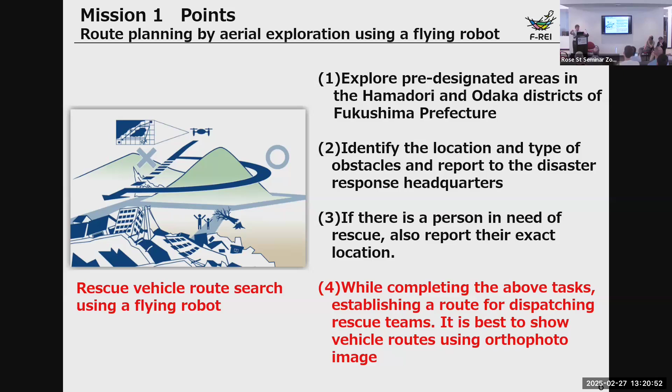Let me explain mission 2 a little more. You can see the 2 persons with a help sign, and you search for letters, English letters like water, medicine, clothes, or food. Then you have to transport such requested supplies. You recognize the letters painted on the ground first, then deliver supplies requested by rescuers by landing or dropping at the designated locations.

Mission 3 is inside a building. The mother drone will carry the kid's drone, a small drone, and then dispatch the small drone to go inside through windows or some door. Windows are normally not so big, below 1 meter wide, so the small drone goes inside and checks on the victims like this. This is mission 3.

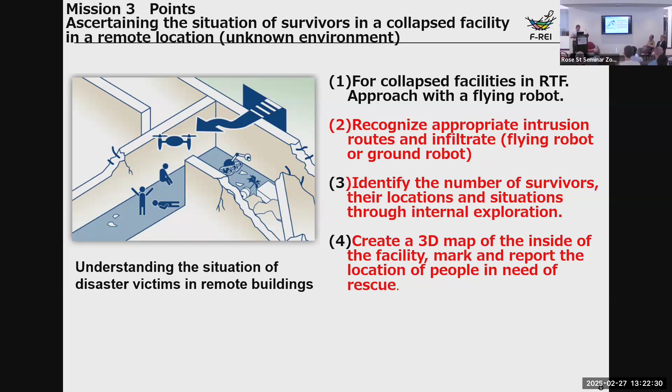This is a harsh environment drone challenge, so a radio wave relay system is needed to realize safe and reliable operation. You can use many drones, that's okay - we don't have a limitation on the number of drones. So many drones is much better than just a few small drones.

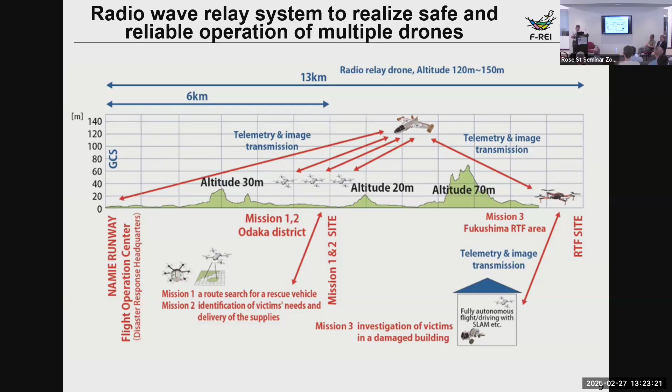You need a radio relay system like this, because we have very small hills, 30 meters high or 70 meters high like this. So this is one difficult mission, one of the difficult missions.

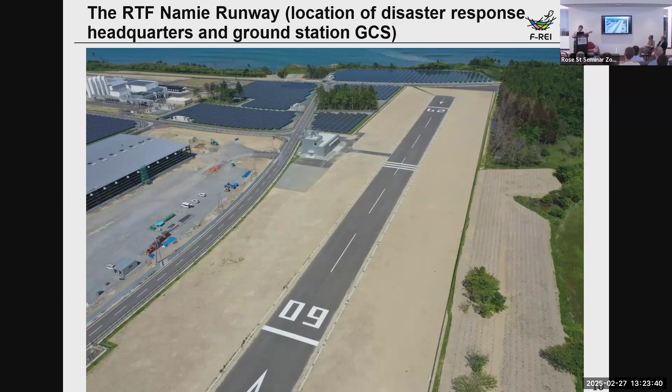This is the takeoff and landing site, like a runway. You can use fixed wing aircraft also, because this is a takeoff site and also landing site. This is a top view - it's almost 100 meters wide and 500 meters long.

For mission 1 and 2, as I already mentioned, one is the rescue vehicle route search. Mission 1 is the left-hand side of this area, and the right-hand side is the mission 2 area. You search the letters on the ground, and then another drone transports supplies requested by victims.

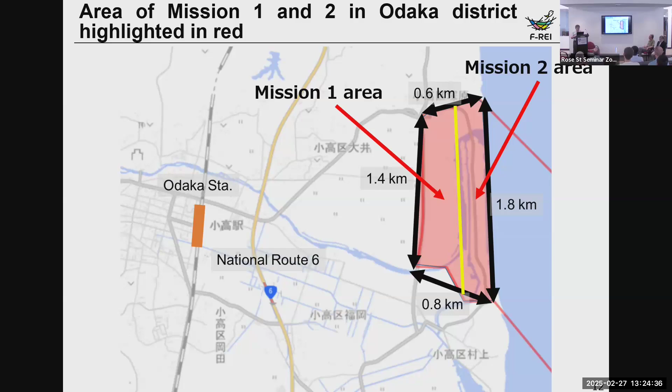Mission 3 is a 3-story building like this, at the robot test field, inside of the robot test field. You can see the small windows, so you go inside through this kind of small window. A very, very high hurdle, I think.

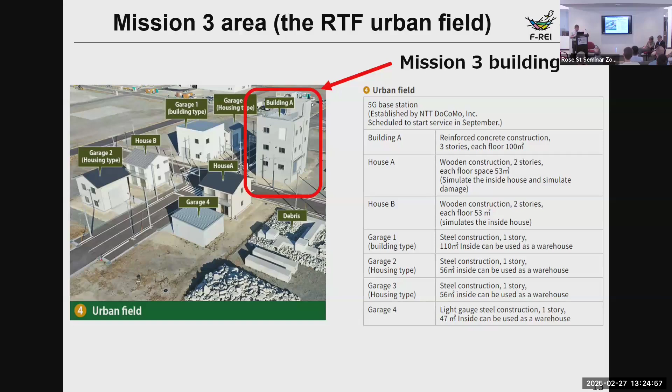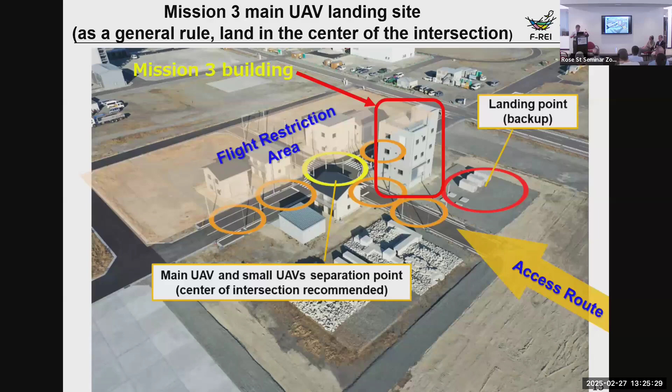So mission 3 is this. This is an overview of the robot test field - 1 kilometer long and 500 meters wide, so a very wide area. You can hover or land in this area, the yellow circle and the red circle and so on. There's an access route here, because we have a high voltage power line, so you can't fly over the power line.

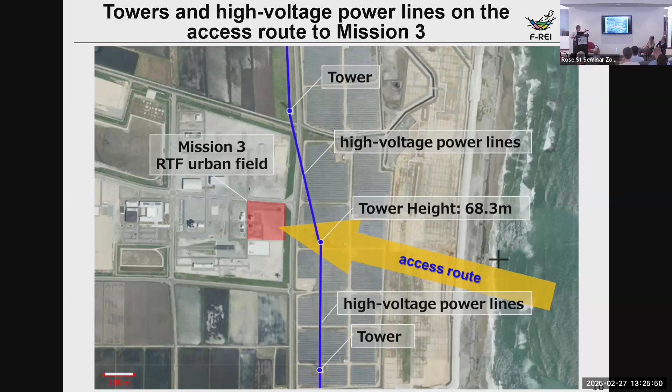So the access route is shown here. On the right-hand side is the Pacific Ocean, so this is the east side, this is the west side.

And after application, we verify all the documents, and we are going to submit them to JCAB, the Japan Civil Aviation Bureau.

So JCAB will check and evaluate all the documents, and then we can get the permission to fly.

This is maybe the same process in Australia. Every country has the same process. You have to submit documents to get permission from each country's civil aviation bureau, so this is the same.

And then October 10 to 12, the 3-day challenge will follow.

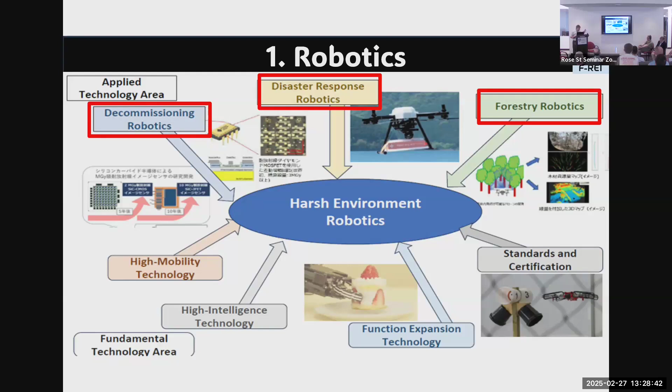So we have very huge, very important 3 missions.

And I already mentioned recruiting researchers. So this is a call for researchers - if you like Japan and Japanese culture, and...

if you'd like to research in Japan with other members, please apply to this recruiting system. We are recruiting researchers at any time.

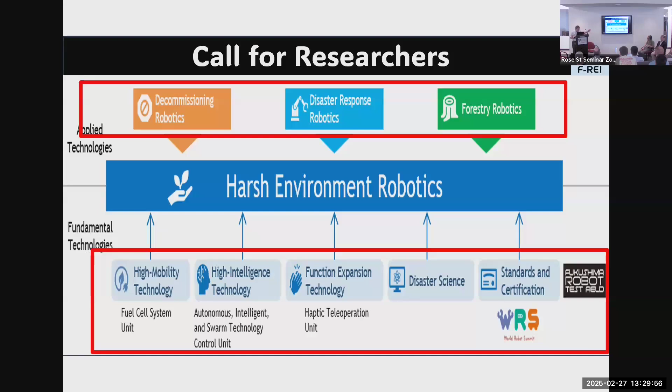The second one is high intelligence technology, like autonomous intelligence and swarm technology. The third one is function expansion technology, like haptic teleoperation - Professor Ohnishi will talk about this.

And for high intelligence technology, Professor Matsuno will present after this, along with disaster science, standards and certification.

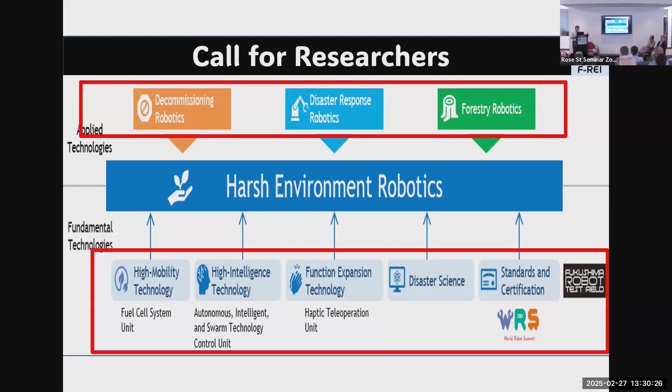Okay, so now we have myself, Professor Matsuno, Professor Ohnishi, and Professor Tomizuka. He is living in the US, at UC Berkeley, a very famous control engineer in the US - he is Japanese, of course.

And the third one, on the right hand side, is the unit leader, Professor Yama. He is leading work on hydrogen-based fuel cells to implement in drones, to increase payload or long distance.

...duration of flying. This is F-REI's robot test field, which joined F-REI this April.

So I'm showing the robot test field. You can use this area if you are an F-REI researcher.

Okay, and the subtopic is UAVs, just briefly. This is the global drone market trend data.

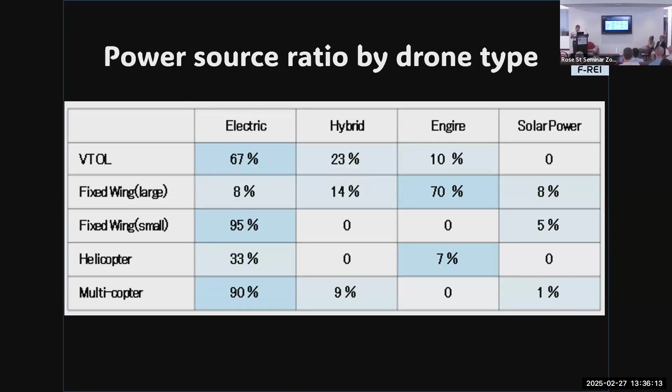So multicopter is almost electric-based drone. On the other hand, small fixed wing is also electric-based, but large fixed wing is based on 70% engine. The helicopter is 33% as well.

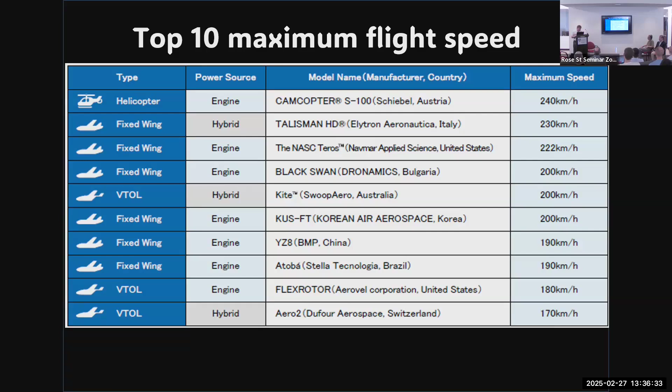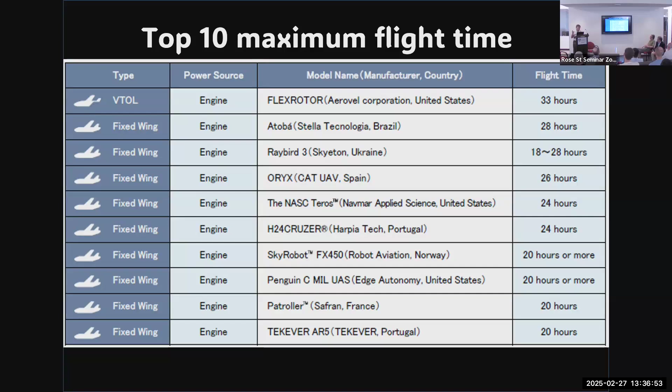This is the top 10 maximum flight speed, a very small number, so I sent it to Professor Manchester. Please distribute to your colleagues after this. This is also flight time, top 10 ranking. I surveyed this myself, not from DII drone industry data. I did it myself, took 2 years to survey. So this is the top 10 maximum flight speed and time.

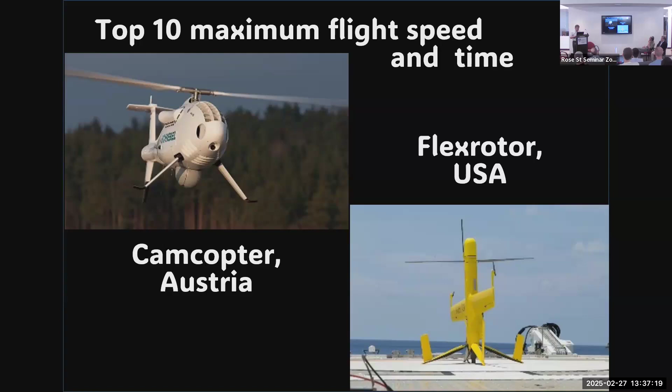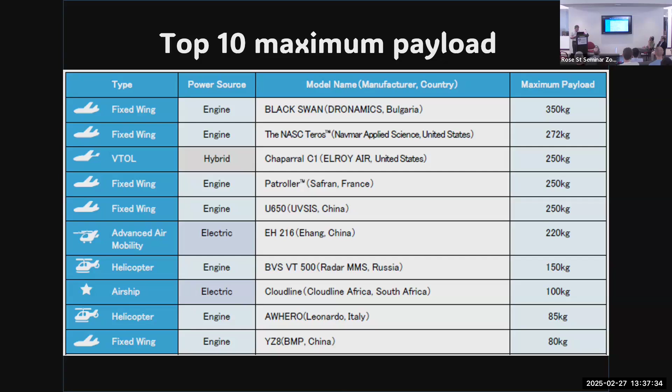Camcopter from Austria, not Australia. Flex rotor from USA. This is a tail sitter aircraft. This is the payload — the big one is 350 kilograms, very big payload, which is Black Swan by Bulgaria, not the USA. This is Black Swan, Bulgaria. It's very big, like a passenger aircraft, very similar to a passenger aircraft, but it's an unmanned system, no pilots. This is the maximum flight speed with electric only.

So this is the very famous Wingcopter in Germany.

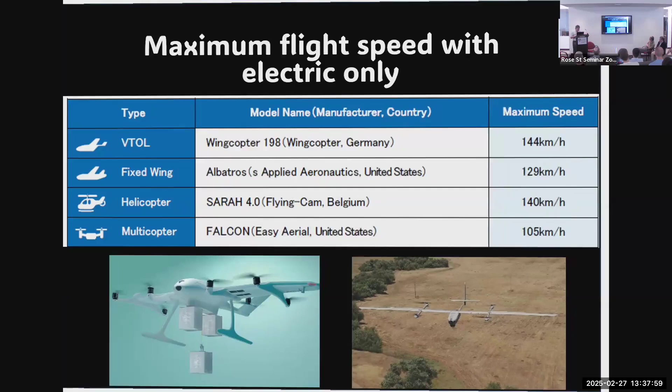After this, I will show you three final movies. These are our companies — I started two venture companies. One is already IPO, the other is still ongoing. My second venture company is in that field. I don't have much time, so I'll pick.

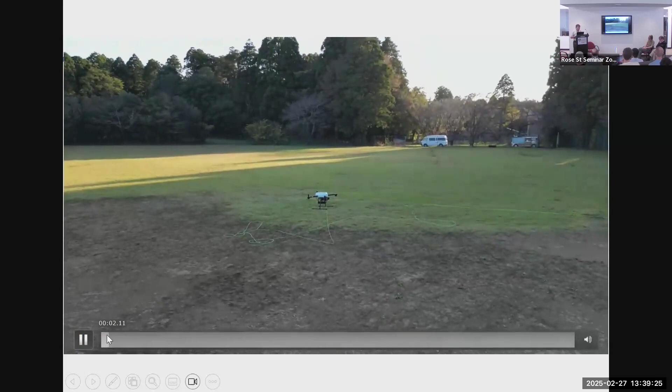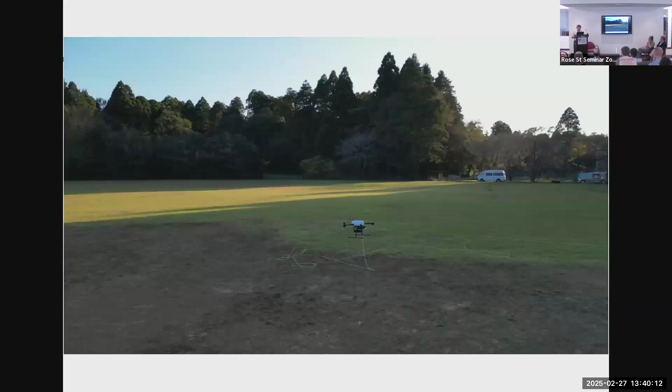The next one is this wire drone. Power supply is coming from a ground generator, so we can fly continuously for 2 days, 48 hours. We can use this kind of wire drone for disaster areas. Telecommunication is very tricky and difficult there, so we can set up this kind of wired drone with a base station, a cell phone base station. Finally, this is a fixed wing.

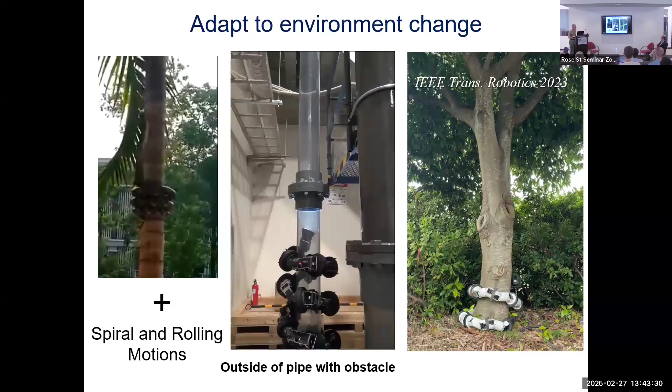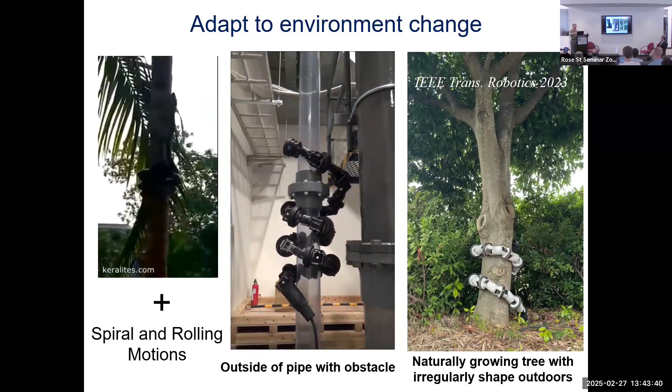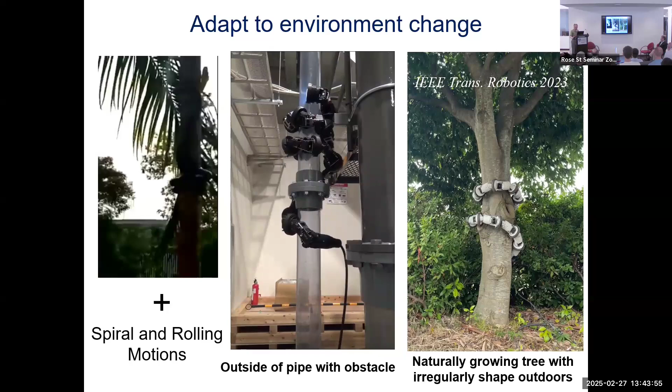Inspired by this movement, we designed a climbing motion by combining spiral and rolling motion like that. The snake robot can move outside of a pipe with an obstacle — some links are lifted to avoid the obstacle, shown in the middle group. Our snake robot can climb a natural, irregularly shaped tree outdoors, estimating the shape of the tree using only joint data and adapting to environmental changes automatically. Friction conditions change and the shape is not uniform, which is very difficult to estimate, but the robot adapts automatically.

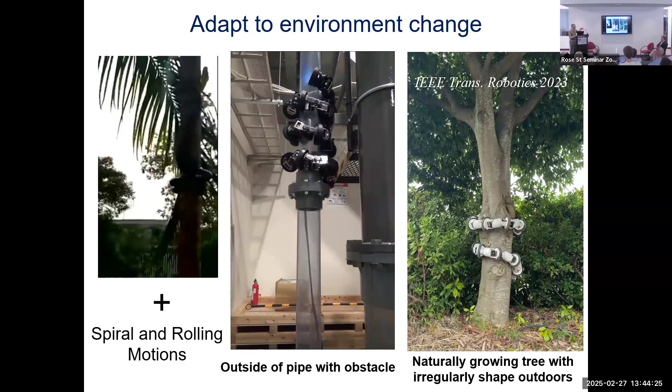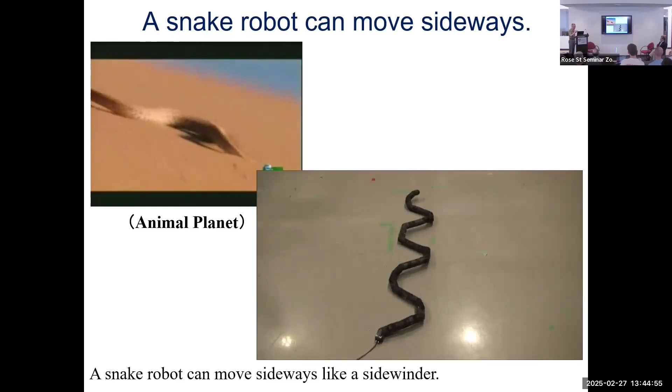Another question: do you think a snake can move sideways? Some of you may know this snake — yes, a living snake called a sidewinder can move sideways on the desert, which is very interesting. Our snake robot can generate a similar motion to the living sidewinder snake, and it can also go sideways.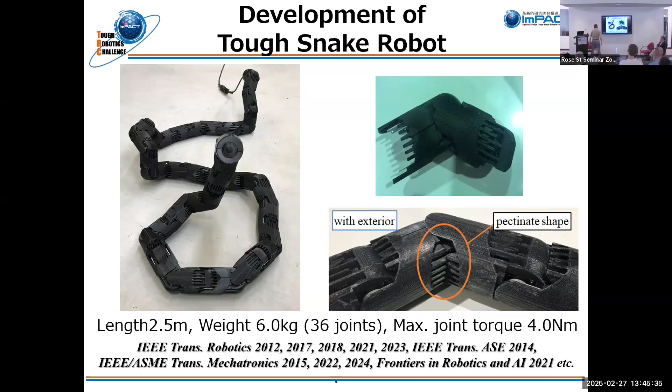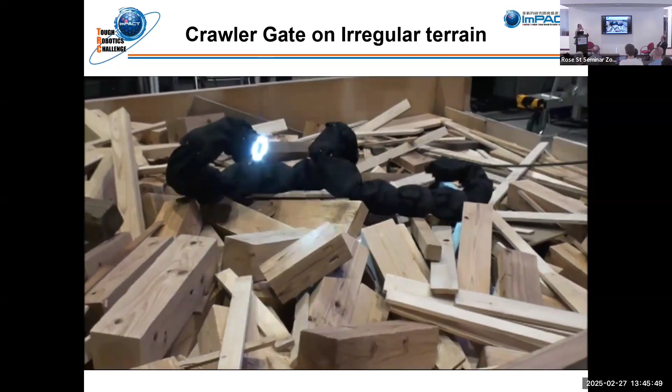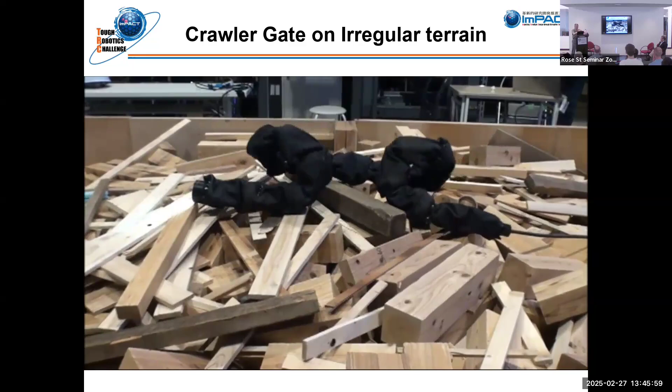This movie shows the robot's movement on irregular terrain. An operator sends a command only to go forward, backward, or turn — very easy to operate, and very easy to move across irregular terrain.

Another question for you: do you think a snake can climb a ladder? Some of you say yes, but I don't know. However, our robot can climb up a ladder like that — both vertical and inclined ladders. Note that the cable connected to the robot does not get caught on the ladder, which is interesting.

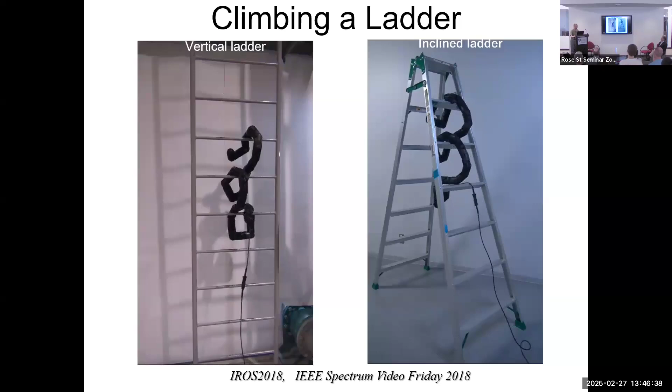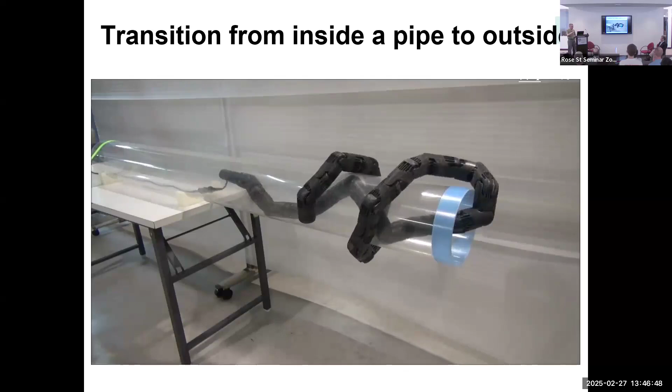This movie shows the movement of the snake robot transitioning from inside a pipe to outside. I think a living snake does not have this kind of motion.

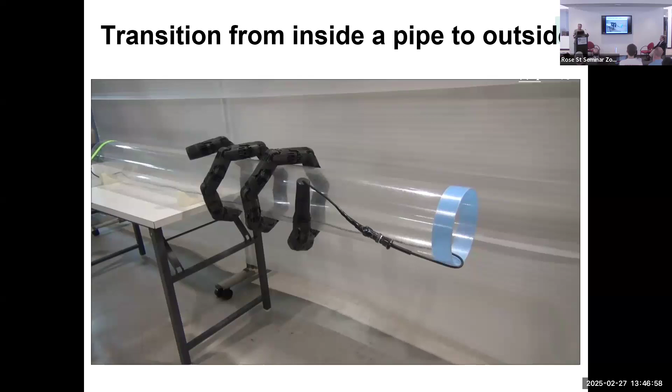And next, we will consider ant swarm behavior.

Social insects, for example ants, have many interesting functions: self-assembly, task allocation, and cooperative transportation, among other things. One key behavior of swarm intelligence is distributed control strategy, for example estimation of global information by only local interaction of individuals. Very interesting.

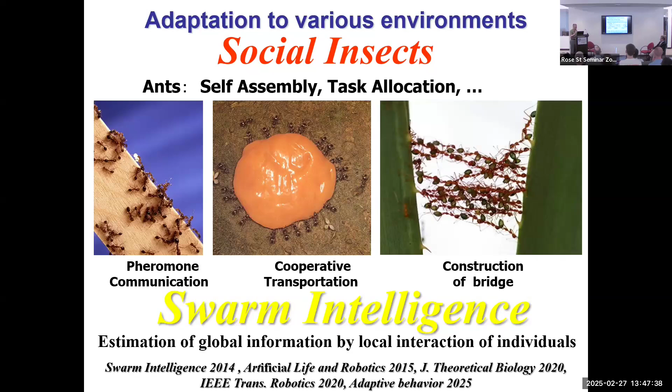Interaction between each agent is designed by introducing a potential function. If the distance between two agents is greater than some constant d, an attraction force is generated. If the distance is less than d, a repulsion force is generated. If the robot hits an obstacle, a repulsion force is generated. And if we have a goal, an attraction force is designed to reach the goal. Very simple. This is the fundamental idea behind the decentralized control law for navigation of swarm robots.

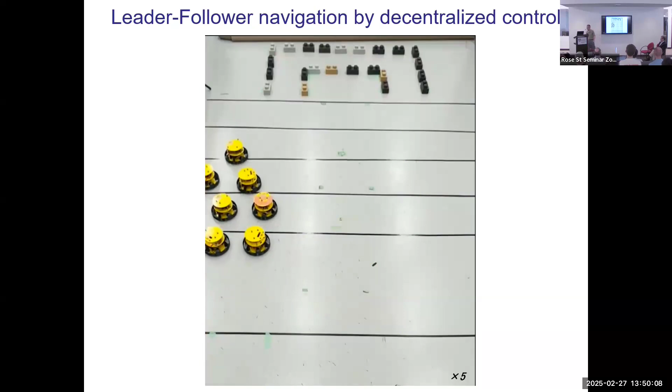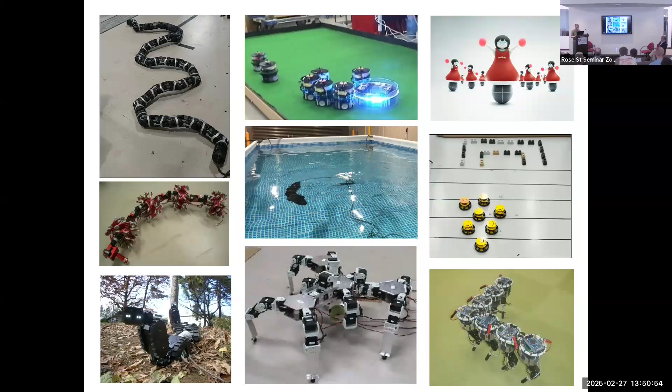We have developed some bio-inspired robots. What are some useful applications of bio-inspired robots? That's a very important question. As Professor Nonami said, the Great East Japan earthquake was a complex disaster caused not only by the earthquake and tsunami, but also the Fukushima nuclear power plant accident. Due to the effect of radiation, humans cannot enter, so robots should be used.

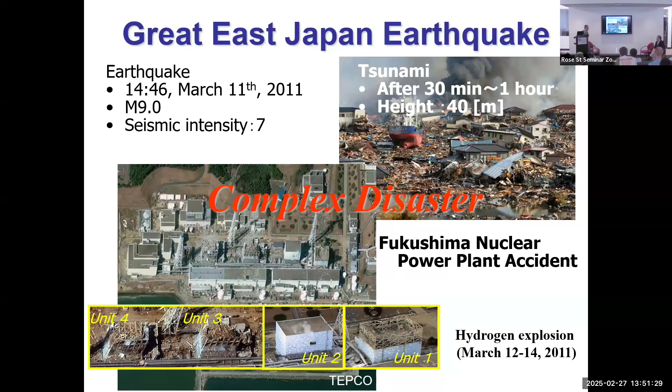This is the destroyed Unit 1 building. The Fukushima Daiichi nuclear power plant Unit 1 was investigated for inspection of its interior. Since wired UAVs face movement restrictions, a wireless access point was installed at the head of a wire-guided snake robot, which can communicate with wireless drones. This is a collaboration between the snake robot and the flying robot.

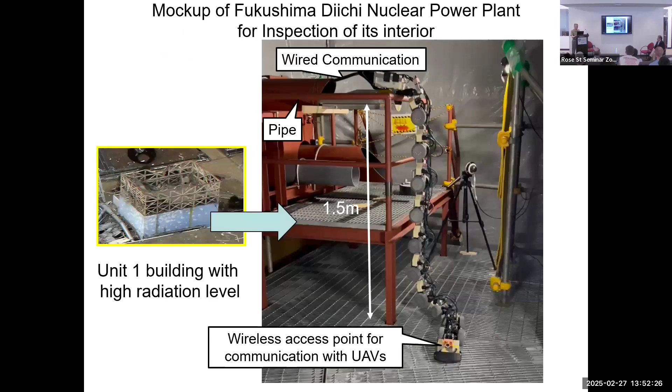This movie shows the image from a UAV inside the Unit 1 building in Fukushima. This is the snake-like robot, and at its tip a wireless access point is installed. The wireless UAV goes into the deep area of the Fukushima building. This is cooperative inspection in Unit 1 building at Fukushima by heterogeneous robots.

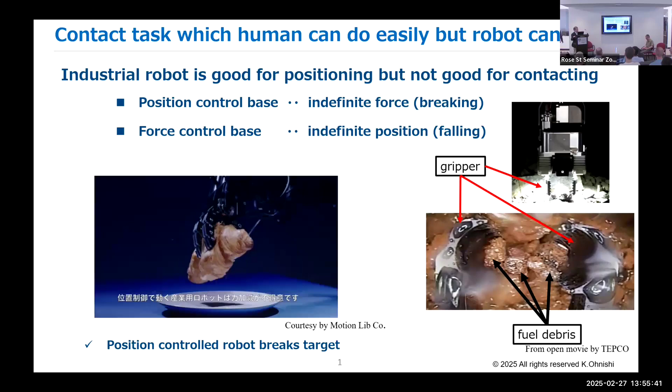If the robot is position-based and doing some contact task, it may break the target. And if the robot is force-based control, it may drop the target.

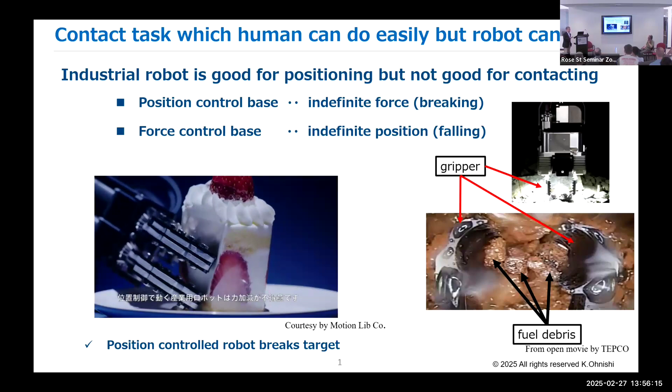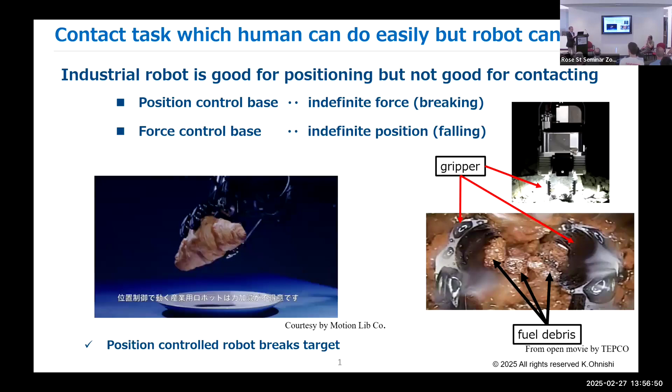But if the force and tactile sensation is given to the robot, then the robot can do any kind of contact task. And in that case, real haptics is playing a very important role, because real haptics is a kind of technology to digitize and transmit and record the sense of touch.

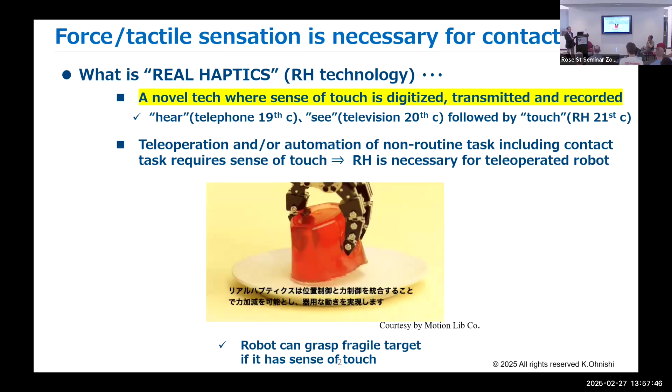Okay, here we have 5 senses. Hearing was invented in the 19th century by Graham Bell, and it was the telephone. And in the 20th century, visual sensation is transmitted by broadcasting, I believe almost 100 years ago. But transmitting the sensation of touch is quite difficult. And recently it succeeded in digitizing, transmitting, and recording the sense of touch.

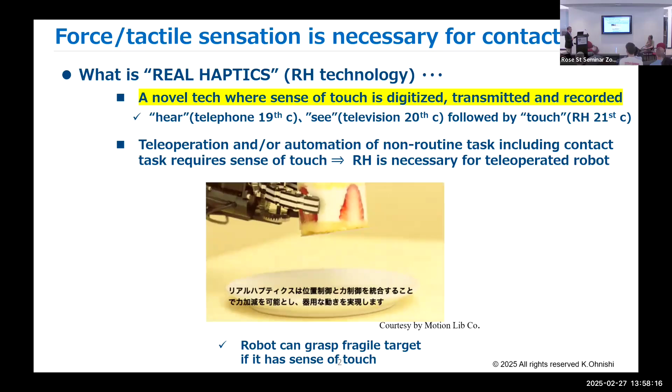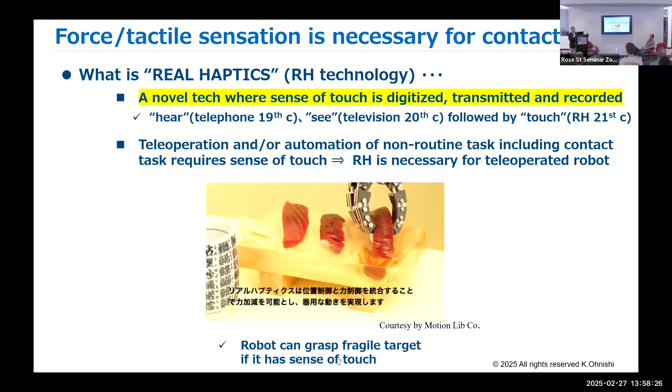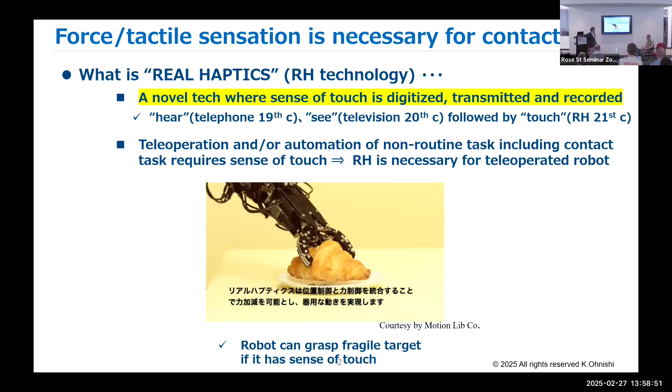And teleoperation and maybe automation of non-routine tasks and such, most of them, including the contact task, require the sense of touch. And real haptics is mandatory for teleoperated robots. This movie is a kind of teleoperated robot, and the robot can grasp such fragile things very successfully. And it's almost 10 years ago.

But at first we should know how to digitize the sense of touch. Unless that, it's quite difficult for the robot to install. And it is necessary for the robot to see or hear by digitizing visual and audio sensation if possible, by camera or microphone. And also it is necessary to digitize the sense of touch for contact tasks.

But how to digitize the sense of touch? That's an issue, a long time issue. And any type of sensation, we have two types: one is intensity, and the other is texture. For example, in visual sensation, we have bright or dark - that is intensity. When it is yellow or red or blue, that's texture. In the same manner, in the sense of touch, we have intensity and texture, like this equation.

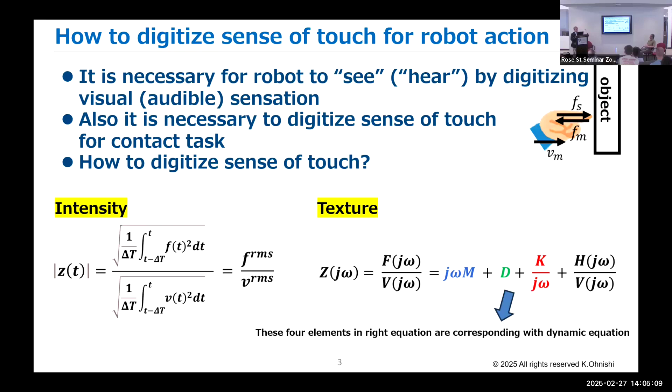Okay, so this is the digitization of the sense of touch. And this is a master-slave system, sometimes called a leader-follower system, or hand side and remote side systems. Or easily I can just say a master-slave system. And the master robot is operated by a human.

And the remote robot can send a digitized sense of touch. Then the human can feel that and unconsciously feed back like an action command. And the remote robot can just follow the human with the sensation of touch. Okay, but this is good - but one remote robot needs 1 person, so it's not automation, so it's not good for the industry.

So this can be substituted by an AI system like this. The unconscious part is human action data. Yes, AI always needs data.

By master-slave system, we can record all of the action data, say every 0.2 milliseconds. The amount of data can be obtained by the human motion by operating this human robot. So if she or he can do some task, according to the task, we can have all of the motion data. So motion data can be obtained.

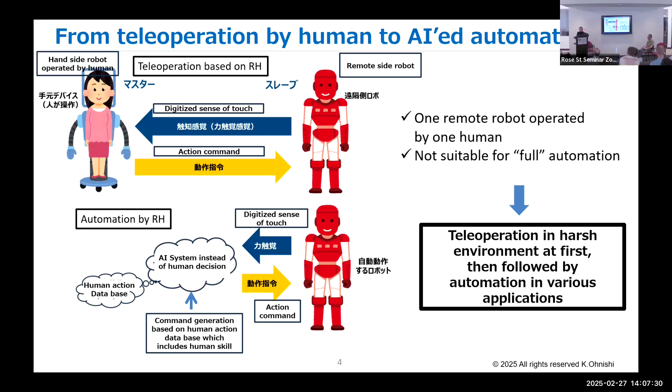Okay, how to make a real haptics technology. This is very simple. This is the hand side device, and this is the remote side device. And we can employ two port systems like this.

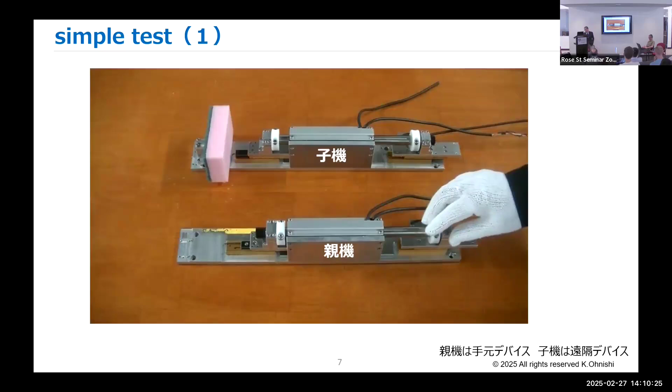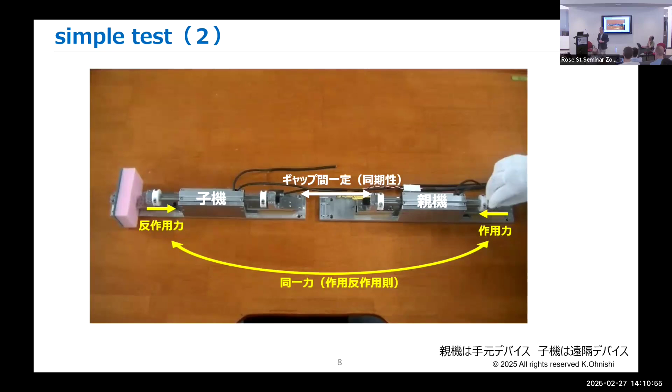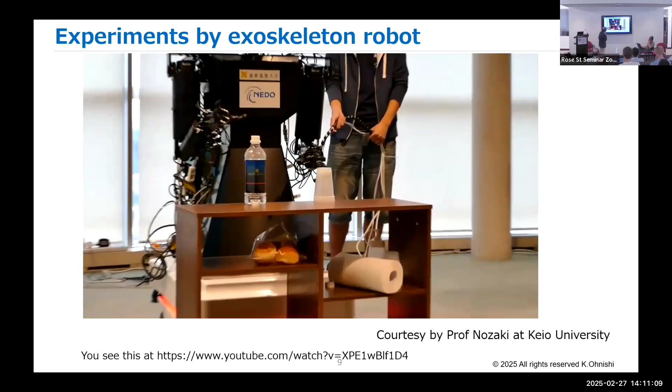Okay, this is the experiment by the exoskeleton robot, and this is a universal robot. It can have 4 cups, but only 1 cup is selected, and the robot can pour water inside the cup.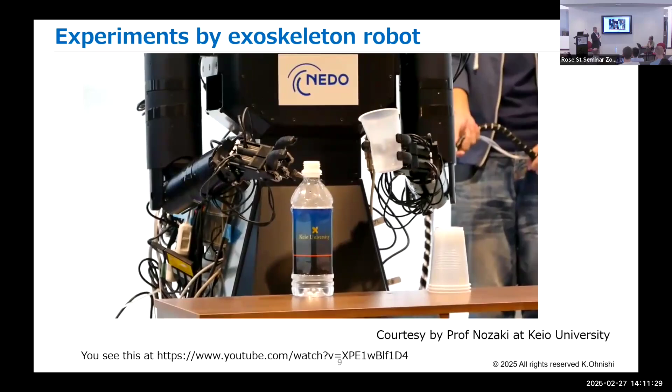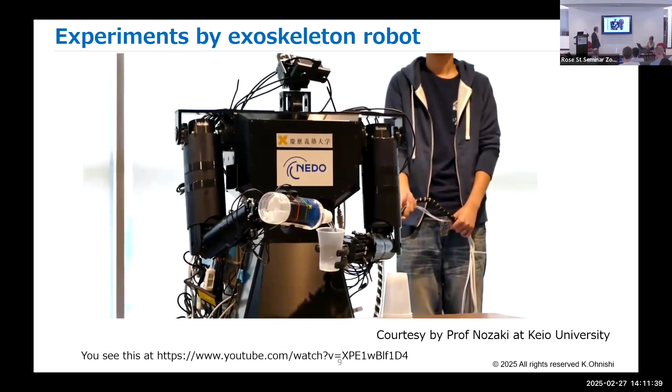The problem is that this robot is not so strong, so it's vibrating a little bit, probably not ideal. But we can do that. Such kinds of systems are possible.

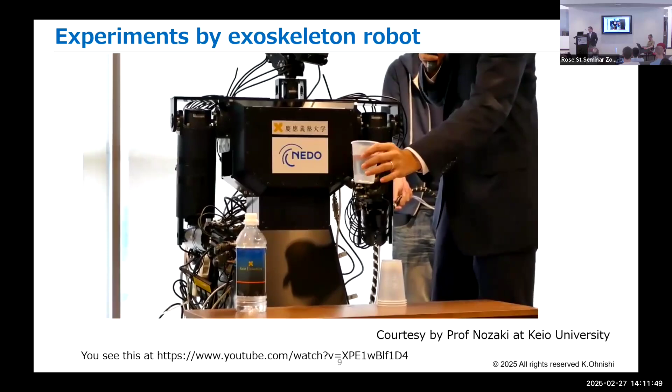Okay, coffee powder is on, and you can check temperature. You know, 80 degrees is very good for the surface, right? And this is the temperature key.

Okay, that's good, and it's cold a little bit. So, the empty cup is here. Okay, the rest of the water is there.

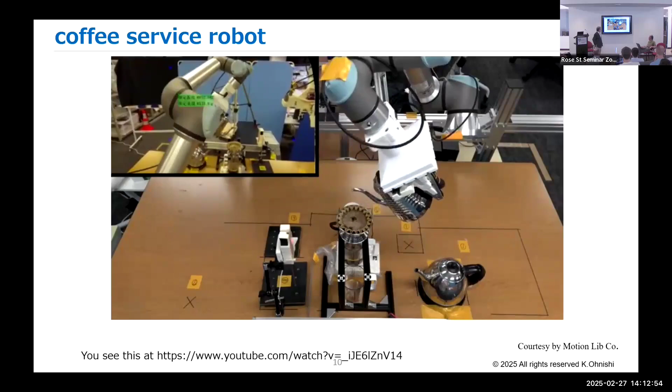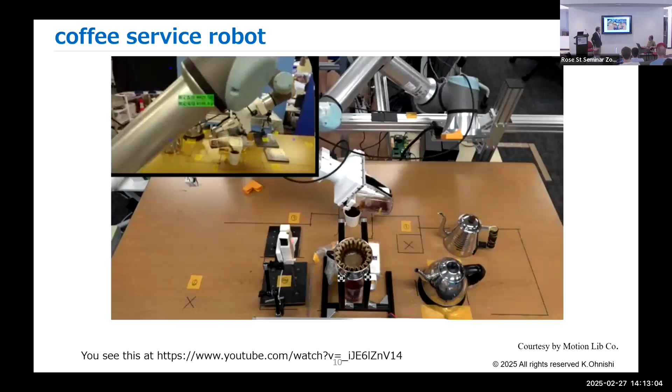Finally, it's completely served to the paper cup. The paper cup is full, but it can handle that. So the robot can adapt itself to the environment.

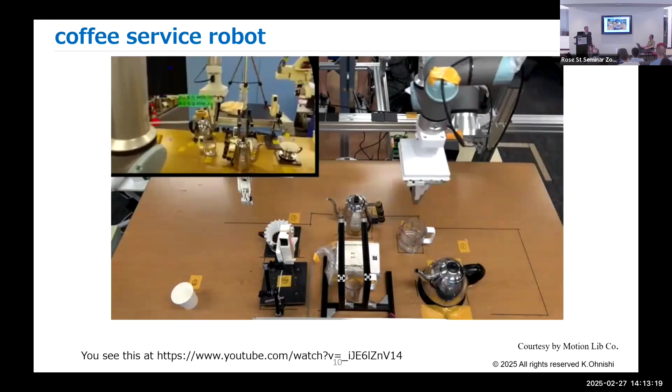Okay, I'm skipping very important matters because of the shortage of time, but we are seeking PD researchers, and we have some research on these two items. One is various tasks by remote operation in harsh environments, and the second is automated robots for industry. These two points are very, very important.

And my talk is not limited to specific applications such as taking the debris from the reactor, but I think this is possible for all industrial applications. So we need many PD researchers in this field.

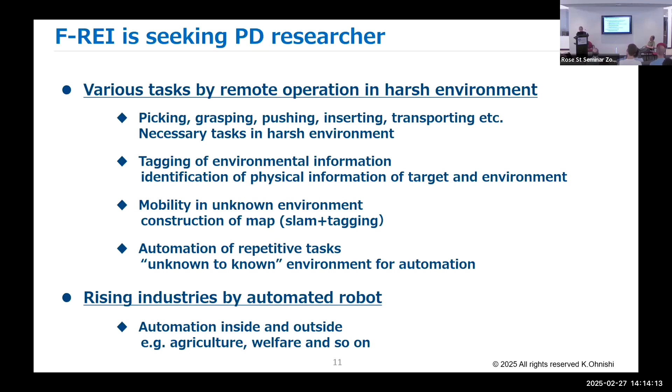Okay, thank you very much for your attention, and I hope that we have a nice time in the future. And my robot is proposing a toast to you. This robot, inside is aluminum, and outside is rubber. Okay, thank you very much.